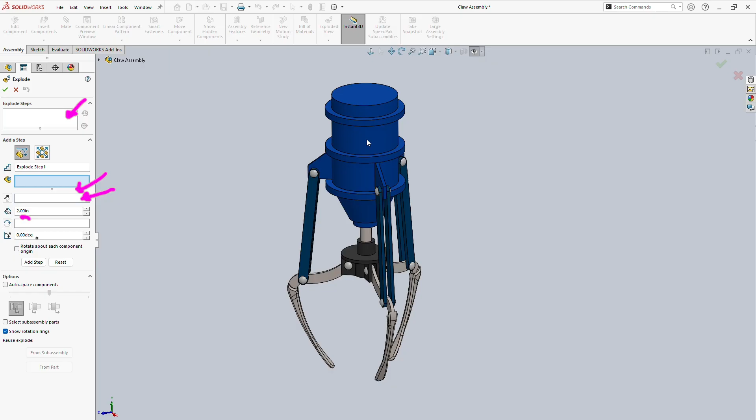So with that, when I open my exploded view, I've got a bunch of options here that I'm going to talk about because this is going to go pretty fast. First up here are all of my steps for the explosion. So each time I'm moving something, that is going to be populating up there. And then below it, I have my option for what pieces I'm selecting. So when I click on this piece, it's about to populate in there. I have my direction for what direction, and I can set a distance. I can also set it to rotate, but that is our basic couple pieces that we will start with talked about here.

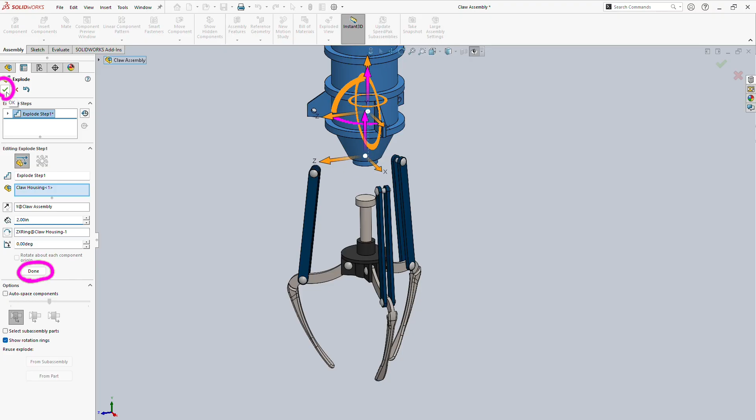So resuming here, you see that I've grabbed my housing and I pulled it up, and it has populated in those categories. Now I have finished with this step. I want to move on to my next one. The correct way to do this is to click this Done button down here. There is this OK button, which seems very tempting, especially from all the times that that green check mark has been the right thing to do in the past. However, we'll see in a second that that green check mark is going to cause you much pain if you accidentally click on it in the future.

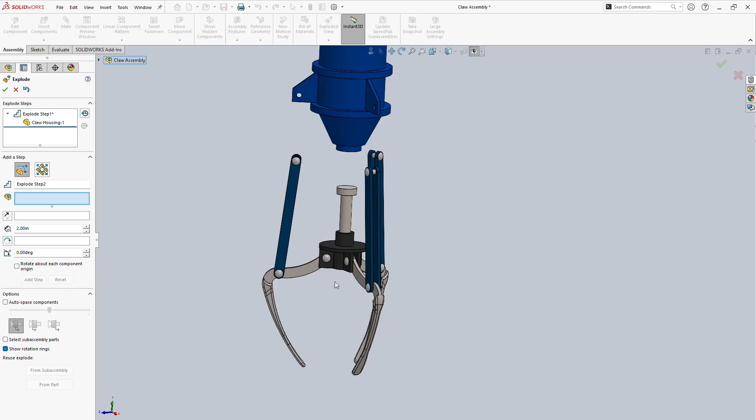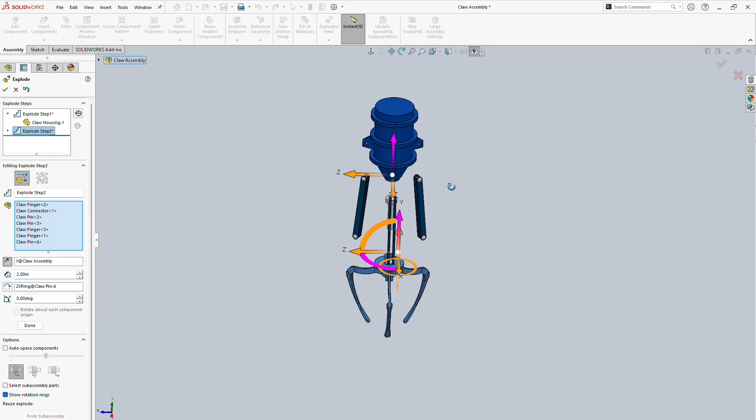So I hit Done. As you can see in my exploded steps that I talked about up top, it's already added it, and I'm on to explode step 2. For this one, I'm going to show that I can actually select a bunch of different parts. So I'm selecting all of my little knobs and my feet that I want to pull down here. And I'm pulling all of them down at once. And I've set that direction. I'm going to set it to another clean 2 inches. And this time I'm going to go ahead and hit that checkbox instead of the Done. And as you see, that exited me out of my explode step.

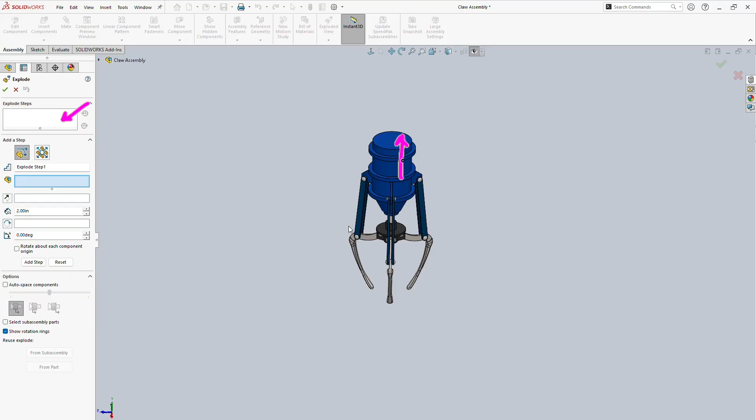So natural thought is let's go ahead and click on a new exploded view. We just clicked right back up here on exploded view, and the result was we're starting from scratch. There is nothing in our explode steps, and this guy was pulled up, and all of this here was pulled down, and we have lost all of that stuff now, which is definitely not what we want. So I could start from scratch and start pulling things out, and then I accidentally hit the checkbox again. And what's actually happening here is I'm creating a bunch of different exploded views.

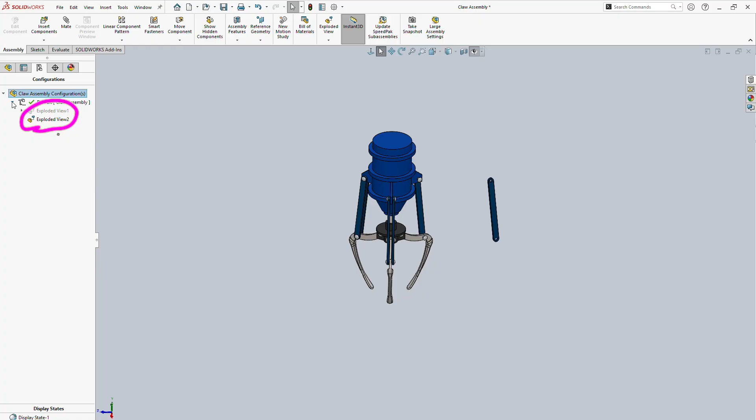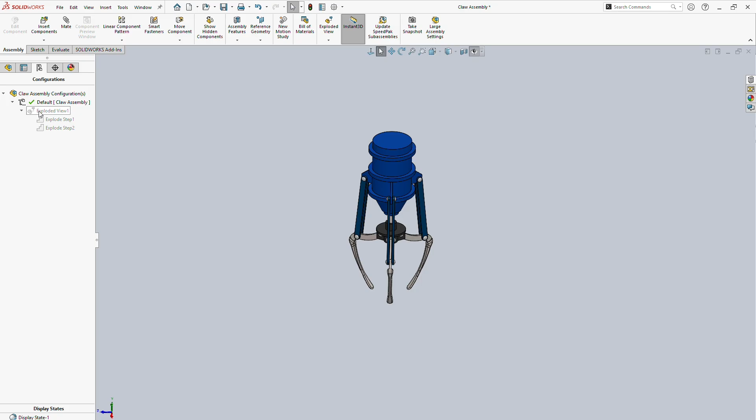So right here, we see that we have 2 exploded views that have been created. And that's the 2 that we just did. As you can see, I can go back and I can view each of them. So one, I pulled out the one piece, and one, I pulled out the other stuff. I really only want the first one, so I'll delete everything other than that. And then to get back into this, when you inevitably accidentally hit that checkbox, we have our edit feature right here. And that is what's going to allow us to actually go back and change our existing exploded view.

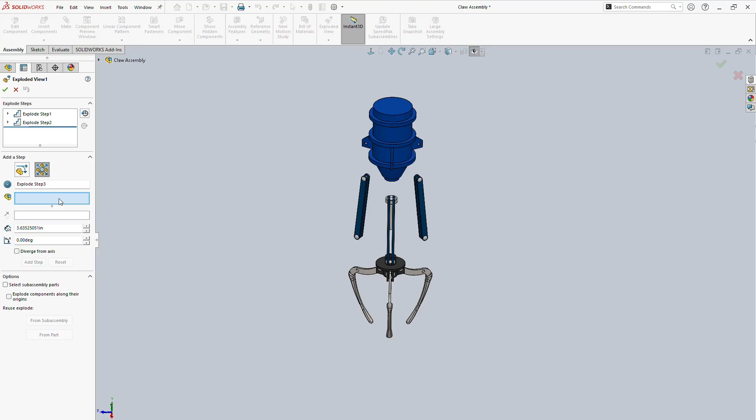And with this, we're going to show off a new command here. This is the radial explode. I clicked on this guy right here. And so far, nothing looks terribly different. But what I'm going to do is I'm going to select a bunch of pieces with this. So I'm going to select all of these legs. And I'm going to say that I want them all to move away from this central axis. So I could use an axis, I could use a line. I just used my cylinder, and I said I want everything to go evenly away from that cylinder.

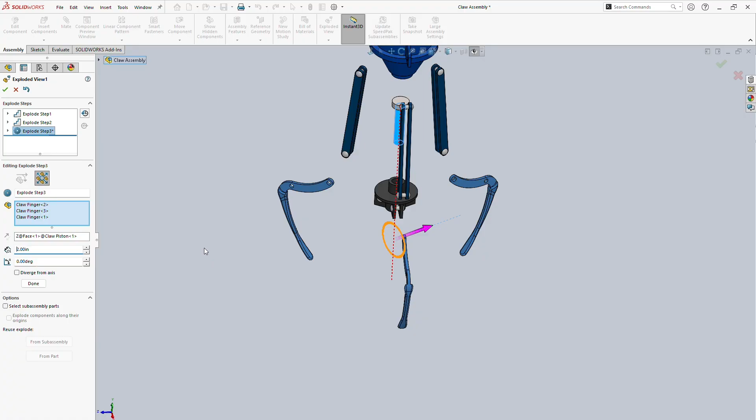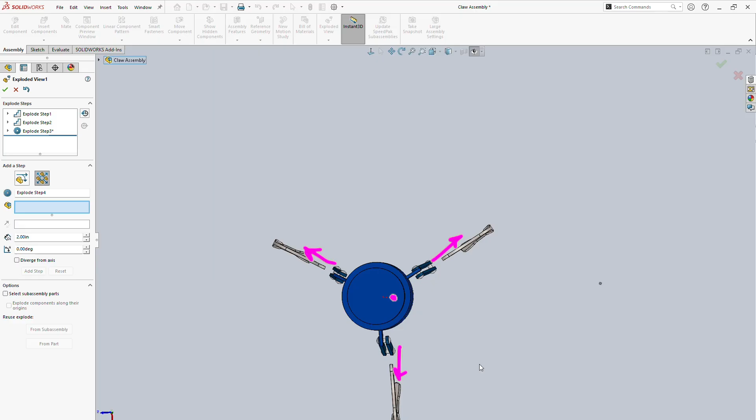And all of these pieces have moved now 2 inches directly away from that center point there. And it's moved all of them in different directions, where before everything had to move in the same direction. So let's actually go back a second. So we can see that this guy moved this way, this guy moved this way, this guy moved this way. So it's all coming from the center point that I selected. I said everything needs to move away from that in a radial explode.

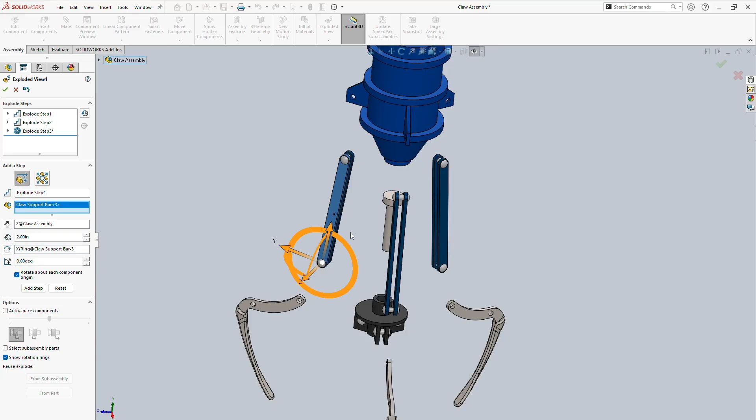It can be very handy in skipping some steps because we need to add a bunch of steps in order to make this all take itself apart. With that, this is the basics of explode that I think you... Oh, no, one more thing that I want to talk about is the direction. So I've been kind of choosing the automatic directions. You can set direction however you want. So you can see this first example of how I'm setting it. I didn't just choose my automatic pieces that showed up.

I said, well, I want to be perpendicular to the top plane. So I went in and I clicked on the top plane, and you can see that my movement is now giving me the option of directly straight out from it, or it's giving me the option to rotate it along the top plane if that was what I meant by selecting the top plane. So this can be helpful.

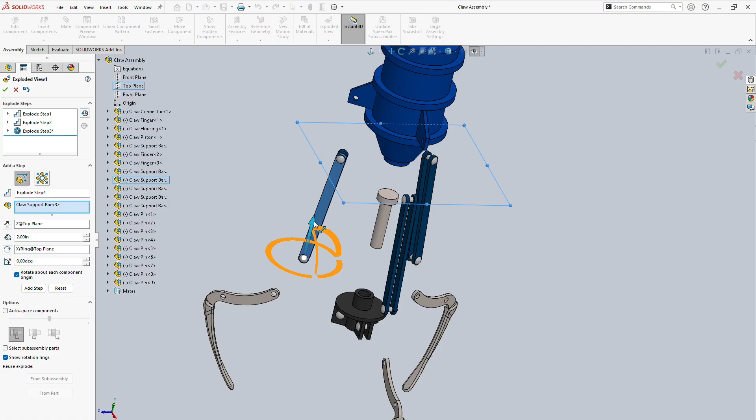Unfortunately this is a big radial part, but more commonly what you're going to want to do is you don't want to move it in the directions that it is set to. You want to move it along a line or a feature of a part, so you can move it directly away from a face of the part, which we'll show in a second.

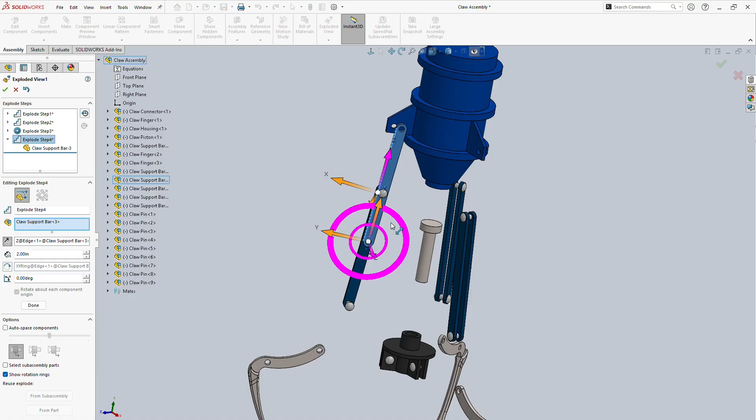But you can also select, and you can see I've selected the line here, and that is what has been populated right in here. And I flip the direction of that line by hitting my little flip button, and you can see now that this movement is right along that edge that I selected. And that is the direction that I have this piece being pulled out. So another way to set direction there. Still not quite what I'm after for the long run, but important to know that you can do that, because often you don't want to use the automatic directions that it's set for you.

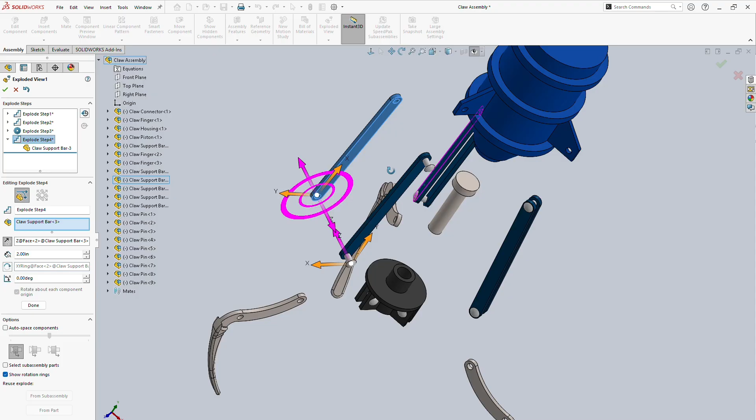I'm going to go ahead and in this case, click on the face. So it's showing the face here. You can see that this face is shaded in, and it's moving perpendicular to that face, just like I had the perpendicular to the plane a little bit earlier. But then I can go ahead and move it in a few more directions that are automatically set based off of lines, edges, planes, whatever I choose to move it away from. Because often your automatic settings, which tend to be the settings for the pieces you've clicked on, how you have those planes set up, are not what you actually want.

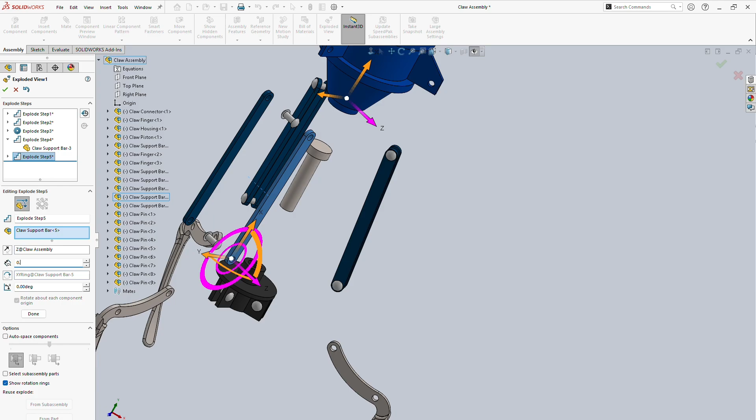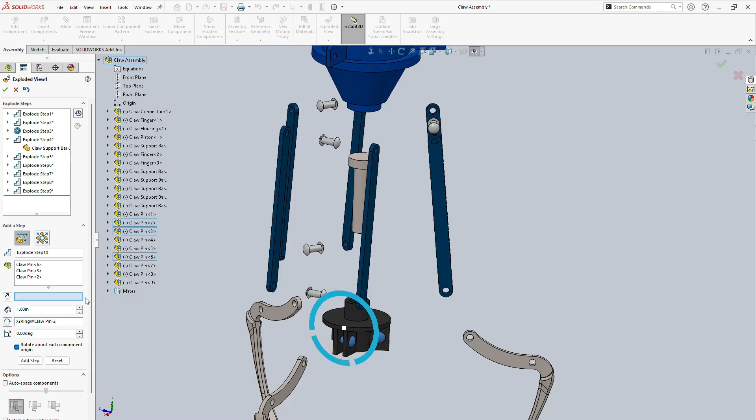So I'm going to skip ahead a second because I'm just pulling a bunch of pieces apart for the sake of pulling them apart at this point so that we have a more complete exploded view. Okay, so at this point, I think this is the last one that I do. I am going to go ahead and pull these last pieces apart. Everything slowed down so much there. So I've got everything exploded, maybe not the best way, but to my liking for the sake of this video.

And what I can do here now is hit my check mark, and you can see that it's showing everything exploded. I can collapse it, I can explode it, and we have the option here to actually create a little mini video for us. So we can do this video when we get to animations, but we can already just do it right there. We can animate collapse or animate the explode, whichever state we're not in. So if you're in an exploded state, it's going to animate the collapse.

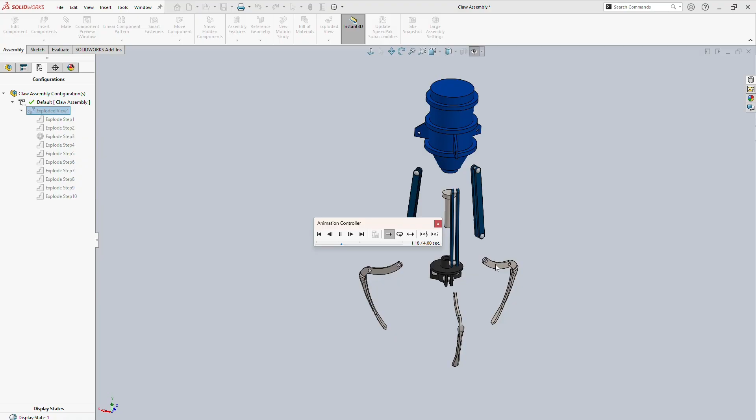If you are in a put together state, it will animate the explode. That actually creates a nice little video for us showing how things came together, or were taken apart in this case. And with that, we do have the option to save it right here.

You should also be noticing that it followed the steps. It went through the order of the steps that I created all of these explodes in. So if you're using something like that, the order does actually end up mattering. You don't want to pull things off wildly. You kind of want to have an order for it. And you can rearrange them within the explode if you need to.

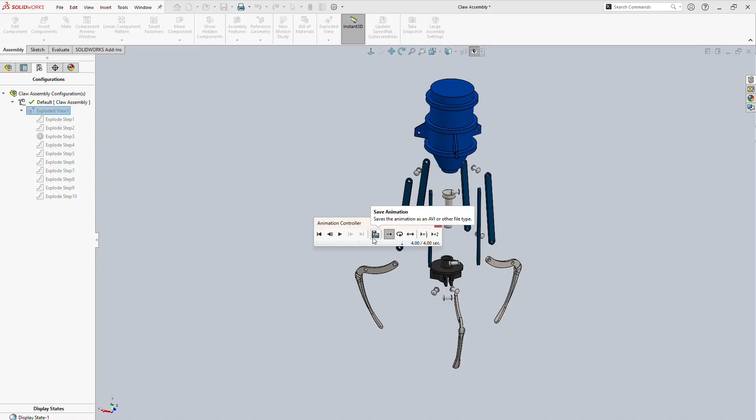But that is creating our exploded view. So now with this, I'm going to go ahead and save my file, and I'm going to open a drawing. You can see that for this drawing, I have the option here to actually show it in the exploded state. There's this little checkbox that's going to allow me to show this piece in my exploded state. For my drawings, I normally want to have a couple views, maybe just a front view, maybe a front and a top, front and a side, depending on what is needed for our piece. You normally want an isometric view of the entire thing put together, and then you normally want an exploded view just to show how things actually went together.

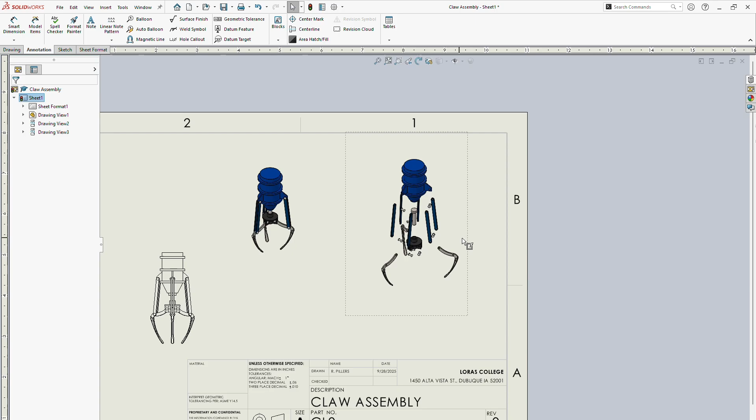This is also where it's really nice to call out different parts. This doesn't have to be the place where you're calling out parts, but it's very often is. Now with this, I actually want it to be a little bit more clear.

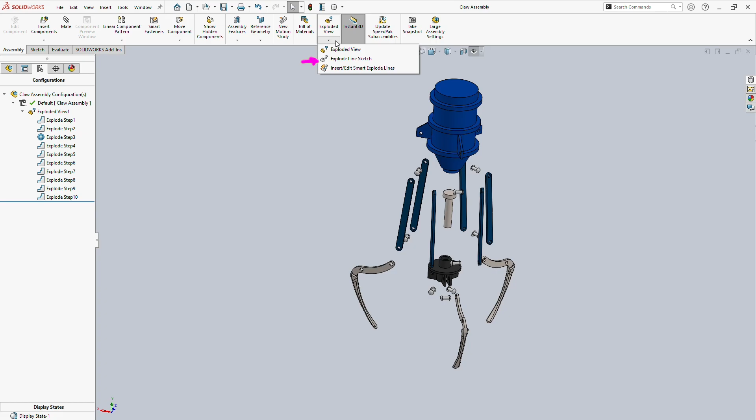So what I'm going to do is under exploded view, I have the option to create exploded lines. There is an option to do it by hand, and it is honestly normally not worth it. If you explode your pieces in a direction and in an order that makes sense, you should never need to use that. Using the smart explode lines is honestly what's worth doing 95% of the time.

So we can add our automatic lines, and those lines are then matching. For instance, if I look at this piece right here, the first thing that happened is this is actually in that second step. Remember, I took all of those pieces and I moved them down, so we're seeing that yellow line for it moving down. Then in the third step, I had the radial explode, so I pulled it directly away from the center, and you're seeing those lines show up for that piece. You're seeing that for every piece that I dragged in some way, shape, or form with my exploded view.

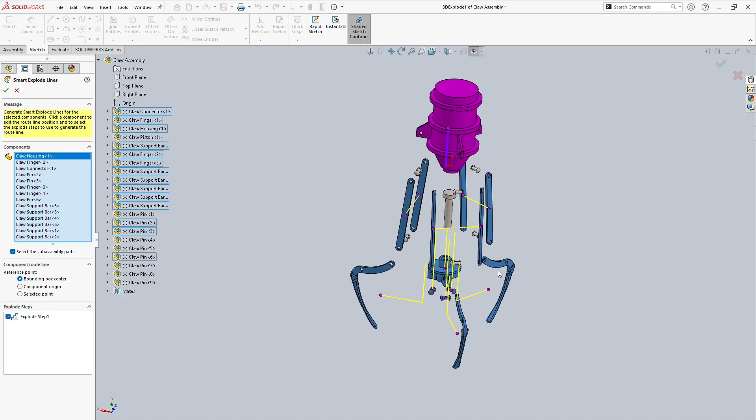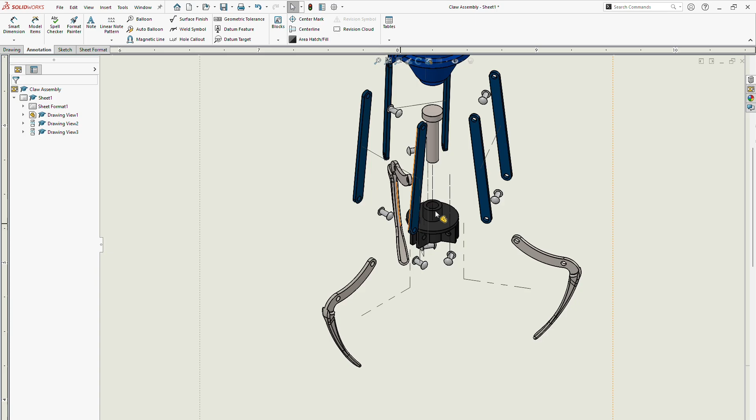One thing that I should state here is this piece was actually all mated together. It didn't just happen to be sitting there, so exploded states don't really care about how things are physically mated together for what we're doing here. But with these exploded lines, I can jump back to my drawing and you can see that I'm showing these exploded lines, and it makes it a little bit clearer. Probably the angle that I'm choosing here is not necessarily the best, but it shows my overall piece.

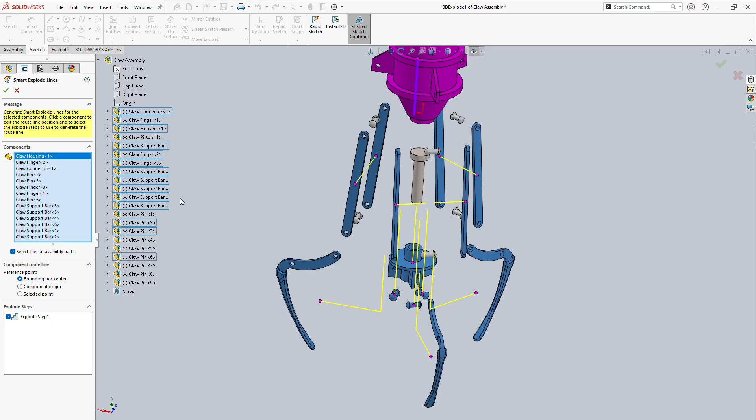One extra piece that I didn't think to show here, but when we actually go into our exploded view, we have the option, this piece for our exploded view. I'm actually just going to jump to the end here where everything is put together. With our exploded view, this piece right here, this is the one time that, if you remember back when we were pulling pieces in, we have the option of all the different views when we're selecting what we're putting in our drawing from our selection points over there.

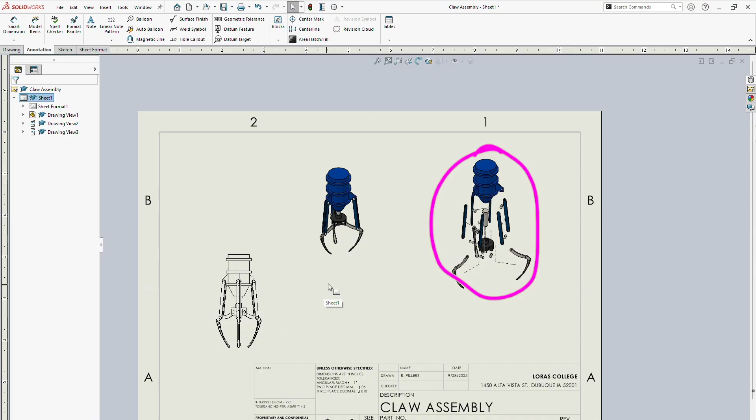This is the one time that you may actually use the show in exploded state option, because sometimes the explodes you really want to hit from a certain angle so you can really see how all the parts go together. If that's what you want, that is perfectly acceptable. But yeah, that is creating exploded views and using them for you.